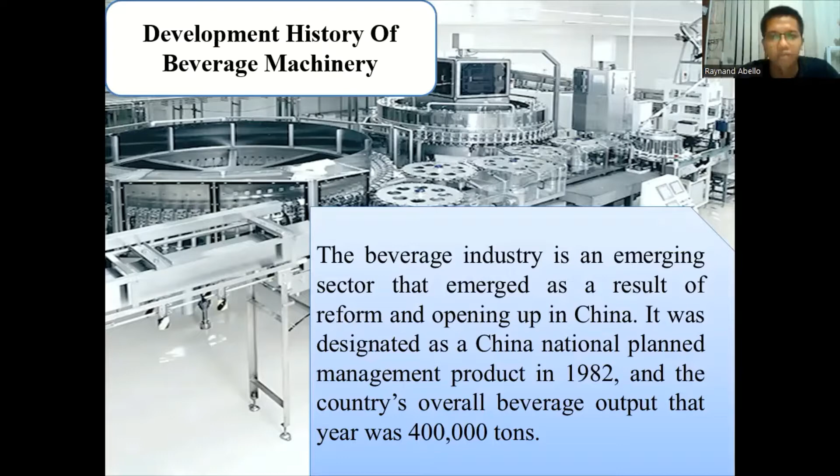Next, the development trend of beverage machinery. High speed, high quality, high precision, and large scale development. The equipment is multifunctional and multi-purpose, suitable for filling and sealing various liquids and various bottle types. Mechatronics is the most crucial trend in the current development of beverage machinery and equipment. To get the most significant economic advantages, beverage equipment is growing increasingly large scale.

The filling speed of carbonated beverage filling equipment, for example, may reach 2,000 cans per minute. The German H&K firm, Seitz Enzinger and Krones company produce 165, 144 and 148 filling valve heads, respectively. Non-carbonated beverage equipment has 50 to 100 heads and can process up to 1,500 cans per minute. It can be used for hot filling tea beverages, coffee beverages, soy milk beverages, fruit juice beverages, and glass bottles and

polyester bottles. The control system of beverage equipment is increasingly reliant on programmable controllers; computer control, fault self-diagnosis, signal display, and cognitive realization are utilized in large-scale equipment. The technical complexity of the manufacturing process, its high level of dependability, and its high degree of self-control across the entire production line represent significant advantages. Because online detection devices and measuring devices are linked, the various factors are detected automatically.

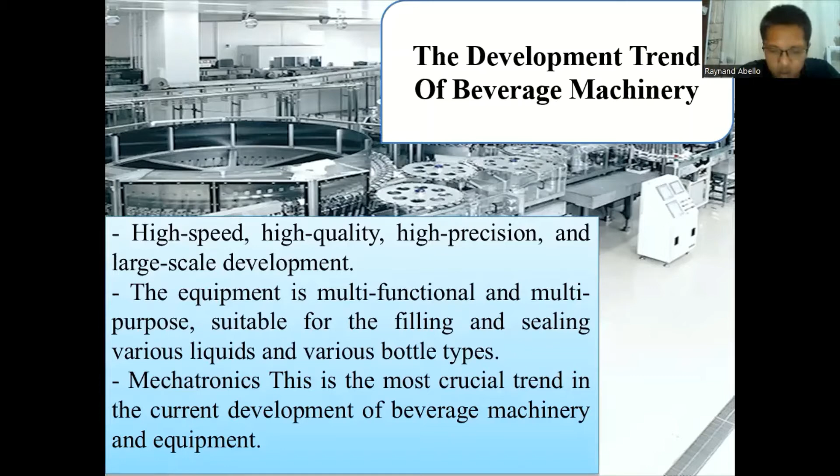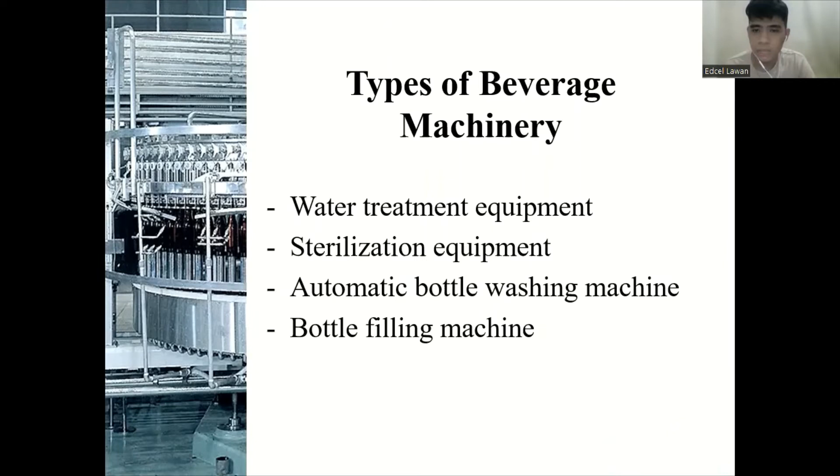So for the types of beverage machinery, there are four types: water treatment equipment, sterilization equipment, automatic bottle washing machine, and bottle filling machine. Water is the most important material in beverage manufacturing. The quality of water has a significant impact on the quality of the finished product. As a result, to satisfy process standards, the water must be treated. Water treatment technology is divided into three types based on the function of the equipment: filtration systems, softening devices, and disinfection and sterilization equipment. Next.

So for the water treatment equipment, there are three types. First is water filtration equipment, which is a system that removes unwanted tastes and odors from mains water to provide clean, fresh tasting water straight from your tap. Domestic systems such as the Water Gem are compact and easy to install under a sink or in a small space. Second is water softening equipment.

It is a whole house filtration system that removes hardness-causing calcium and magnesium minerals from your water through a process called ion exchange. A water softener addresses one of the most prevalent and devastating water problems, for example, hard water.

Third is water sterilization equipment. It is a process of killing, inactivating, or removing microorganisms such as bacteria, viruses, etc. from a quantity of water. The normal methods of sterilization involve agents such as heat, chemicals, or radiation. This method is non-toxic and inexpensive and works rapidly and effectively to inactivate bacteria, spores, and viruses. Next.

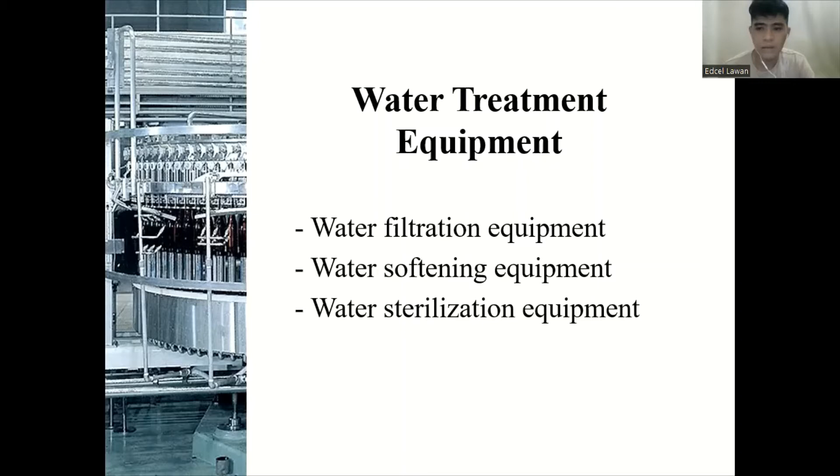So for sterilization equipment, first is the sterilization equipment for fluid beverage. Fluid beverage refers to unpackaged dairy products, juices, and other materials. There are direct and indirect types of sterilization equipment for processing such materials. The direct style is to spray steam directly into the fluid for sterilization. The indirect type is to sterilize the beverage by heat exchange with plate and tube heat exchangers.

Second is for canned beverage. For beverages with packaging containers such as canned beverage and bottled beverage, the sterilization equipment for processing them can be divided into standard pressure sterilization equipment and pressure sterilization equipment according to different sterilization temperature.

Third is the physical sterilization equipment using electromagnetic waves. This kind of sterilization equipment uses microwave, far infrared, ultraviolet, and other physical radiation for heat sterilization. It is a kind of sterilization equipment with development prospects.

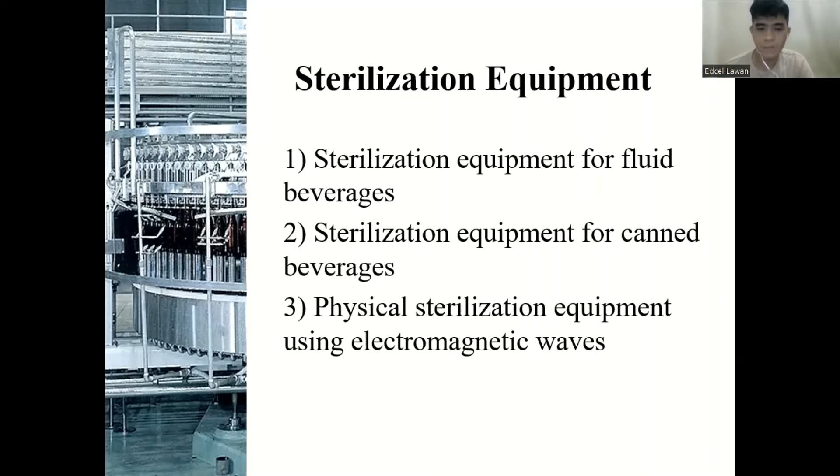For the continuation, automatic bottle washing machine. There are four types of automatic bottle washing machine, which are jet type bottle washing machine, immersion type bottle washing machine, soaking and scrubbing type bottle washer, and soaking and jetting bottle washing machine. So the automatic bottle washing machine is divided into different types according to different situations.

The way of entering and leaving the bottle can be divided into double end type and single end type. The practice of conveying the bottle sleeve can be divided into the continuous type and intermittent type. The method of processing bottles in the machine can be divided into spraying, brushing, and immersion.

Number one, jet type bottle washing machine, including washing the inside and outside of the bottle. The center of the nozzle must be aligned with the center of the bottle. This type is particularly suitable for washing crown cups because the bottleneck is small, generally only about 5 millimeters, and it is difficult to clean the inside of the bottle with other types of bottle washing machines.

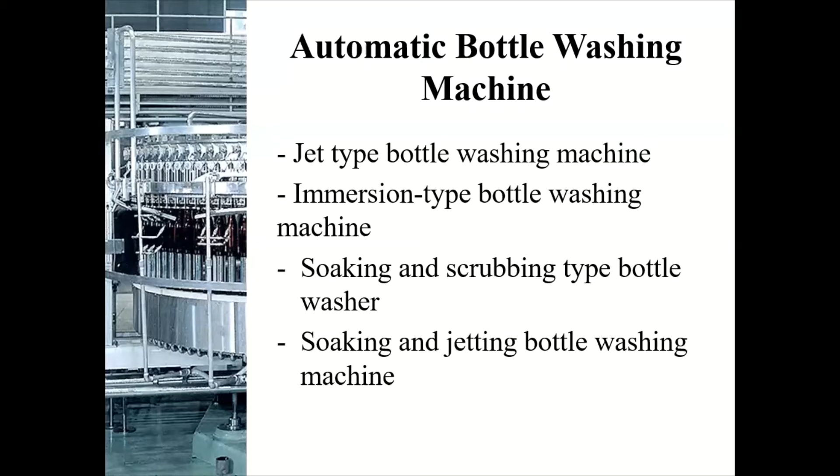Number 4, soaking and jetting bottle washing machine combines the advantages of soaking and jetting. With one or more soaking tanks and more jetting parts, the nozzles are mainly high pressure type. Some people think that when the spraying part is large enough to replace two spraying grooves, the cleaning effect of high pressure spraying can be equivalent to scrubbing with a brush. So next slide.

Bottle filling machine. It has 3 parts, which are isobaric filling machine, normal pressure filling machine, and negative pressure filling machine. It can be classified based on the material used for packaging into liquid filling machines, paste filling machines, powder filling machines, granule filling machines, and other types. It can be divided into semi-automatic filling machines and fully automatic filling machines from the point of view of production automation.

Number 1, isobaric filling machine. The equal pressure filling machine generally maintains a certain filling pressure in the storage box. When the container to be filled enters the filling machine, the container is inflated first. The gas can be compressed air or carbon dioxide gas.

Number 2, normal pressure filling machine. Many beverages such as juice, milky drinks, and syrup in the secondary fillings of soda do not contain carbon dioxide, and normal pressure filling machines are generally used. The normal pressure filling machine is mainly composed of a filling system, bottle in and out mechanism, lifting bottle and tank mechanism, workbench, transmission system, etc., which are used for filling thick liquid. This type of filling machine is generally rotary.

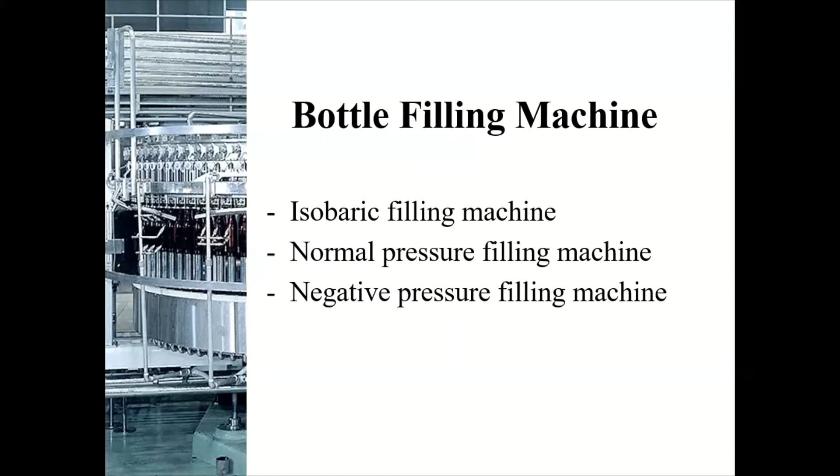Number 3, negative pressure filling machine. A vacuum filling machine is a device that uses negative pressure to fill containers. It may also be referred to as vacuum cylinder, and this filling technique uses normal pressure in the storage box. The air in the bottle is only pumped during filling, creating a vacuum. So next slide.

Materials preparation in beverage production. There are a few materials that are needed, which are fresh fruits, water, carbon dioxide, sugar, flavorings, and preservatives.

Fresh fruits. Most of the fruit processing plants are located in the vicinity of the fruit growing area. It ensures that the fruits can be processed as soon as possible after harvest, as high temperatures quickly affect their quality. On the other hand, certain types of fruit can produce drinks in long-term storage and long-distance transportation.

Next is water. Water is the primary raw material for production. Water used in the beverage industry is usually purified to different degrees depending on water treatment technology and equipment. If not, drink products will be cloudy, have sediment, or be contaminated with microorganisms.

Next is carbon dioxide. One of the other critical ingredients for beverage production is carbon dioxide. Carbonated water products account for 94% of the world beverage market share. Carbon dioxide has the role of adding sparkle and acting as a mild preservative. This is an inert, non-toxic gas that is relatively cheap and easy to liquefy, making it well suited for use in soft drinks.

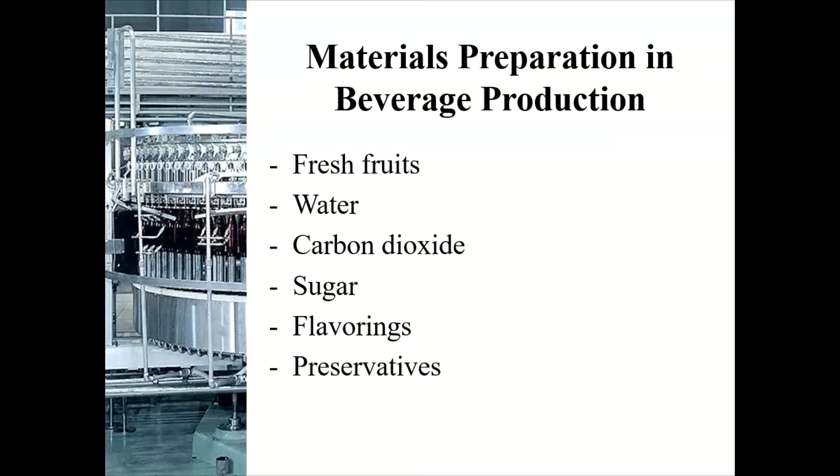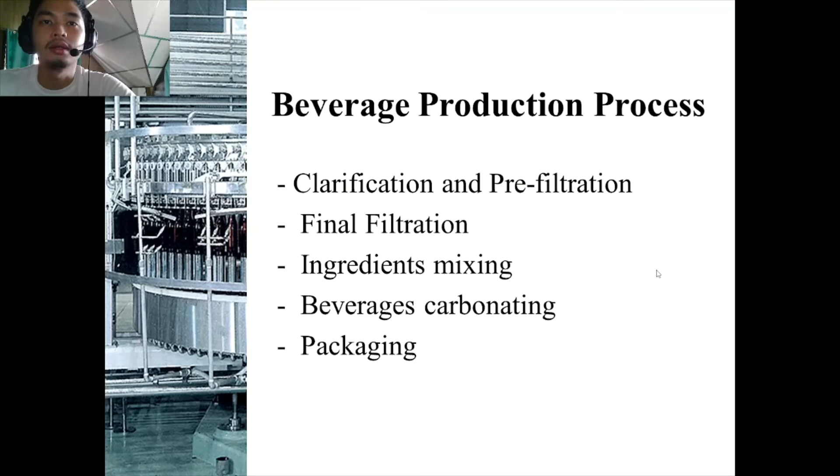I will be discussing the process of beverage production. Under its processes, there are clarification and pre-filtration, final filtration, ingredients mixing, beverage carbonating, and packaging. Clarification and pre-filtration. The cleanliness of the water has a significant impact on the quality of the beverage bottles. Dirt, bacteria, etc. can reduce the taste of the product and cause the product to spoil quickly. Impurities in the water are removed through coagulation, filtration, and chlorination.

A viscous precipitate is mixed into the water. The flux absorbs the suspended particles, making them more prominent and easier to catch in the filters. It is also necessary to adjust the alkalinity to achieve the desired pH level.

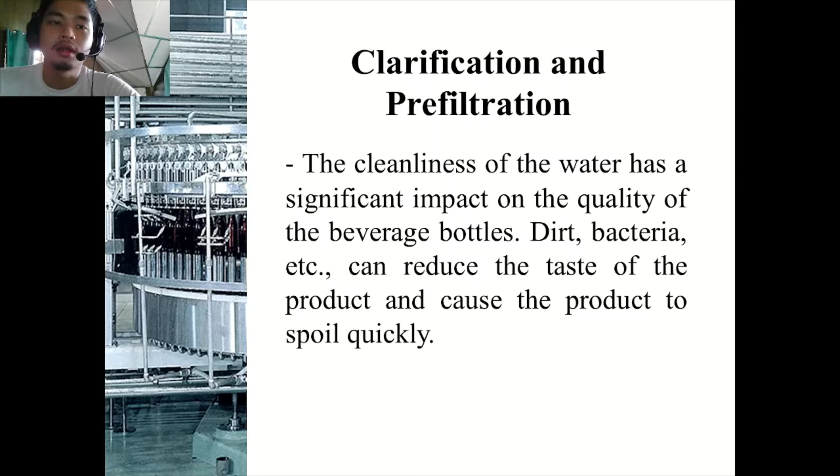Final filtration. The water is then poured through a sand filter to remove any remaining impurities. Bacteria and organic compounds can damage the color or taste of water, so water disinfection is essential. Water is pumped into a tank containing a small amount of chlorine until the reaction is complete. The chlorinated water is stored in the tank for about 2 hours. Next, the activated carbon filter will have the same task as the sand filter, to remove chlorine in the water and remove residual organic material.

In addition, businesses can apply membranes to beverage production processes, helping to ensure the complete removal of particles and microorganisms. The final membrane filter effectively removes 99 to 100% of unwanted microbial content and is ideal as a microbial barrier in a multi-barrier process.

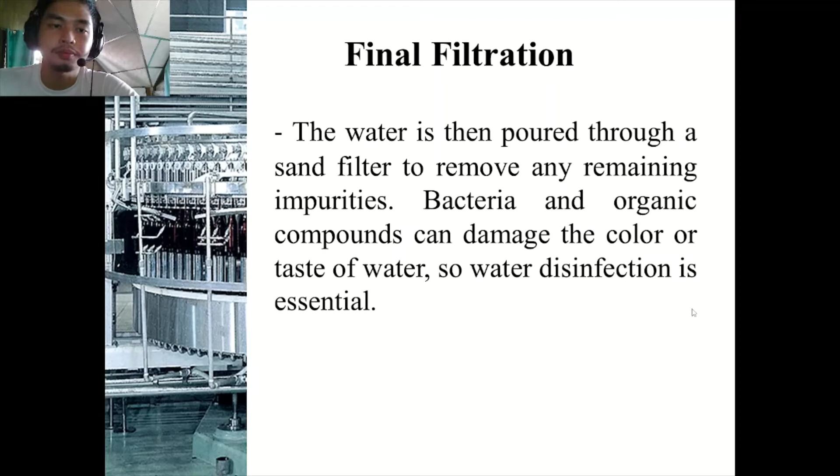Ingredients mixing. Flavoring components, color, and flavor modifiers are dissolved into the exact solution to create a specific flavor. For the beverage product, each ingredient is transferred to the tank in batches and carefully mixed. The syrup will be removed from the cooking pot and passed through a filter to remove impurities during the beverage production process. In addition, the physical impurities that may appear in the sugar and water raw materials can be removed.

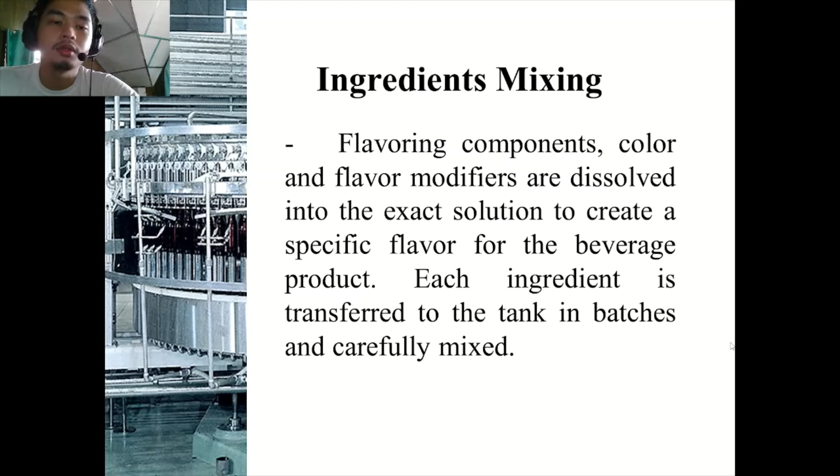Syrup sterilization can be carried out under the influence of ultraviolet radiation or rapid pasteurization. In particular, for fruit syrup, pasteurization is a must.

Beverage carbonating. The first one is CO2 injection, which is carbonation. It is the step of adding carbon dioxide to the drink for carbonated beverages or products. Then the next one is CO2 adjustment. This is a specific step in the processing of fermented products such as beer, etc. The fermentation and propagation stages of yeast have produced a certain amount of carbon dioxide. Then the added carbon dioxide must be adjusted appropriately to ensure quality products.

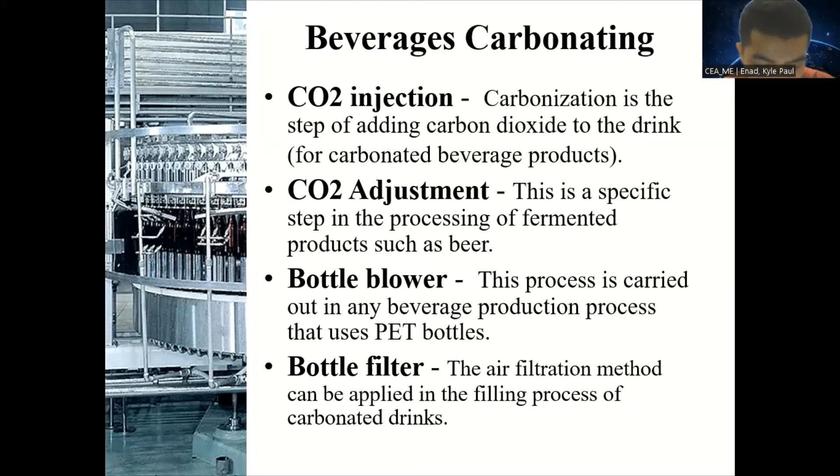Then the third one is bottle blowing. This process is carried out in any beverage production process that uses PET bottles. Sterile air or nitrogen filtered to pasteurized air quality turns preforms into final PET bottles. Then the fourth one is bottle filling. The air filtration method can be applied in the filling process of carbonated drinks. It is necessary to pressurize the filler bowl before the filling process. The gas used in the bottle filling process must also be microbiologically stable.

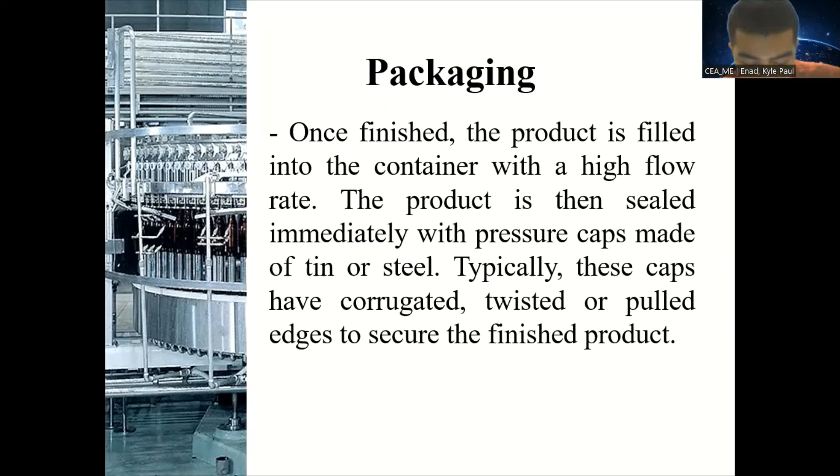So the next one is the packaging. Once finished, the product is filled into the container with a high flow rate. The product is then sealed immediately with pressure caps made of tin or steel. Typically, these caps have corrugated, twisted, or pulled edges to secure the finished product. The product is then labeled on the body of the bottles. The label will provide information about the brand, ingredients, expiry date, and product use.

So for the continuation, materials used in beverage packaging, including glass, metal, high-density polyethylene plastic, polyethylene terephthalate, in short, PET, paperboard, stand-up pouches. Next, please.

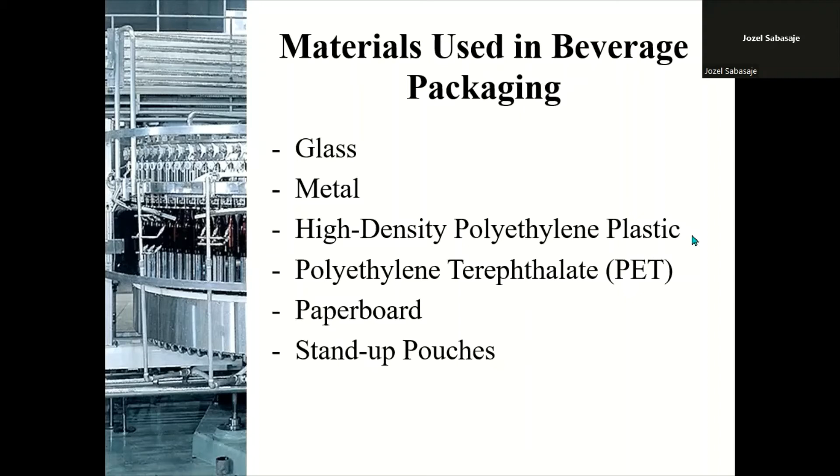So first, glass, a classic material. Glass has always been used by beverage packaging companies, airtight and waterproof. Glass bottles and jars provide an excellent option for beverages as they maintain the freshness and quality of their contents. So flavor is not lost from drinks packed in glass, neither are they contaminated by outside factors since glass is an impermeable material.

Besides, glass is not affected by external temperatures such as heat, meaning it can maintain the product's internal temperature. And as a result, it doesn't change the shelf life of a product. Since it is non-toxic, glass is one of the safest packaging materials. It doesn't require a special lining. Glass bottles or jars have a long shelf life.

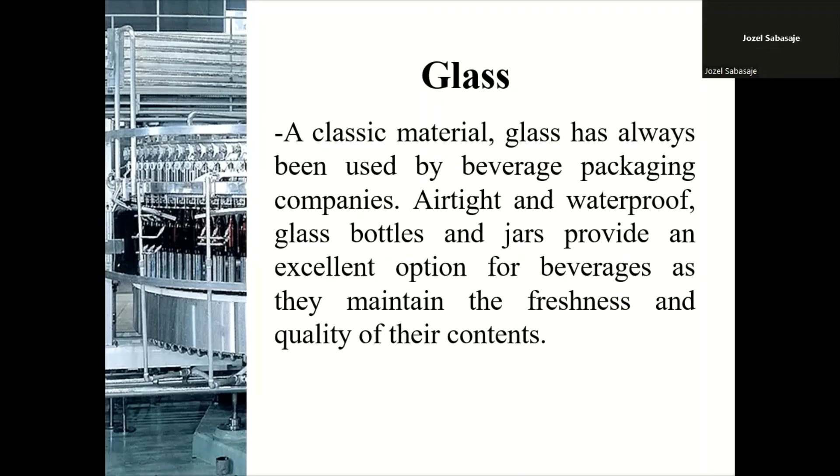Besides, colors in glass bottles don't fade since it is sturdy and recyclable. It makes for excellent packaging material, and the only downside is that glass is easy to break and therefore it is not easy to travel with. So, next slide, please.

Next is metal. So metal cans are commonly used for beverage packaging. They have excellent protective properties, especially against air and light, which can cause adverse effects on the flavor and quality of the beverage. And this helps to enhance the product's shelf life. And cans are resistant to changes in temperature, humidity, and pests, which help to maintain the product's freshness and flavor.

So unlike glass, they are lightweight, long-lasting, and unbreakable. So this makes them an excellent packaging option for beverages. And metal packaging is perfect for those with active lifestyles such as hikers or those who love outdoor venues such as stadiums where glass is not allowed, and metal cans allow eye-catching graphic decoration to attract customers. So they also boost a brand's awareness, and recyclable metal cans are an excellent packaging choice. So next slide, please.

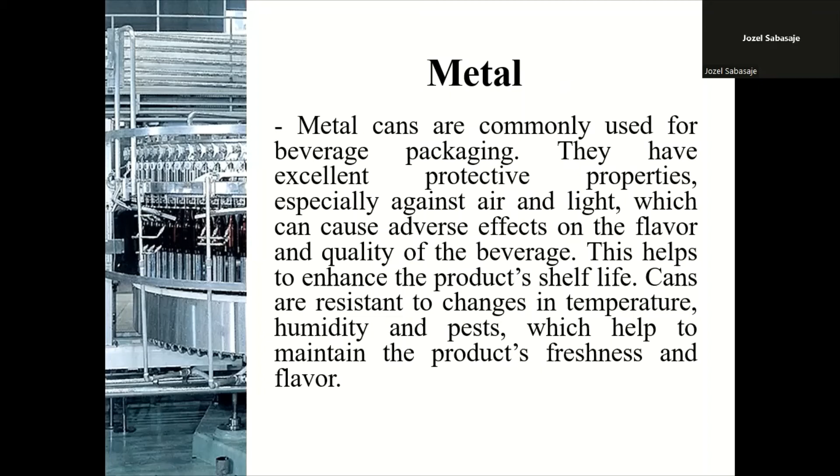So the high density polyethylene plastic. So plastic is a common and widely used packaging material for beverages. So a good plastic bottle is transparent and unbreakable. So they are also lightweight and refillable.

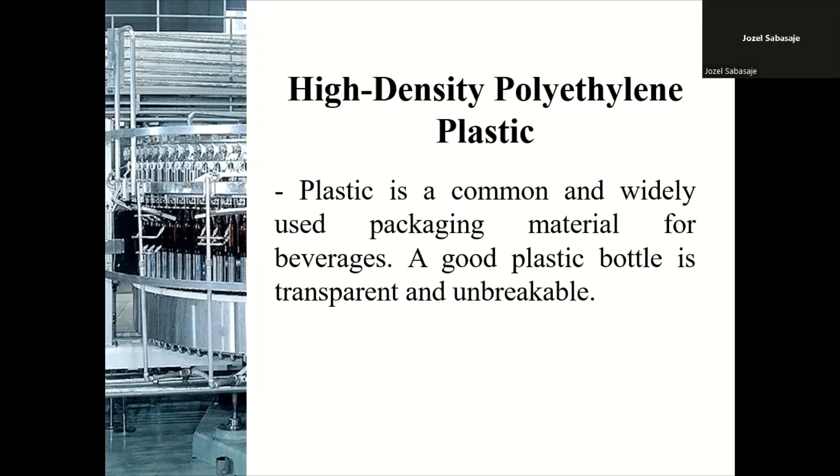So high density polyethylene, in short HDPE, is the most commonly used type of plastic. Many bottles and containers are made using this plastic. The bottles can be colored or translucent, and they are stiff and have exceptional barrier properties. They are suitable for packaging products such as water, juice, and milk. So next slide, please.

So last is the polyethylene terephthalate, in short PET. PET is a non-toxic sturdy plastic. You can cast it into different sizes and shapes. It is durable and very reliable. So PET is shatter resistant and has excellent oxygen, carbon dioxide, and water barrier properties. So it is highly recyclable and a popular choice among beverage manufacturers.

It protects the contents of packaging from contaminants and keeps them at the required temperature. So bottles made from this material can be chilled safely. Their portability makes them an excellent choice for beverage packaging. Beverages such as soda and other drinks are commonly packed in PET bottles. So if properly disposed of, these bottles can be recycled or reused. So next, for the continuation.

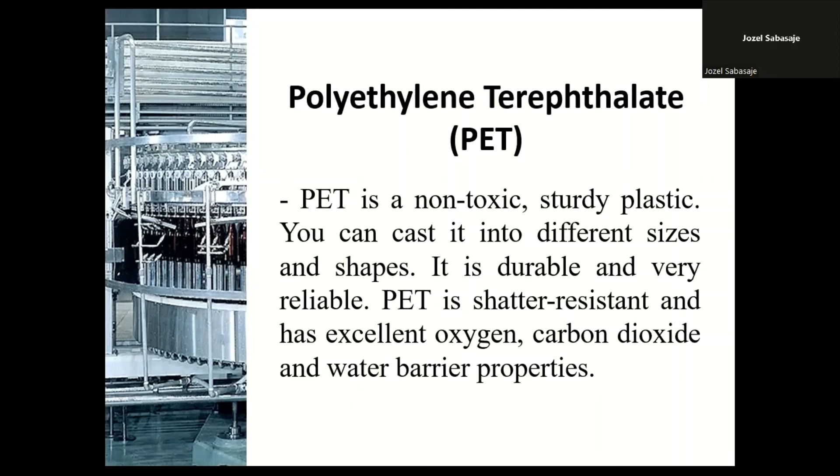Paperboard. Paperboard is made from renewable wood material. It is commonly used to make beverage cartons and provides stability and strength. It also provides a smooth printing surface. Cartons, for instance, are excellent for packing beverages, and they are made of layers of paperboard, polyethylene, and aluminum foil.

Polyethylene protects against outside moisture while helping the paperboard to adhere to the aluminum foil, while the foil protects against air and light, helping to maintain the flavor and the quality of the package content. This makes it a good packaging alternative for beverages since it keeps them fresh.